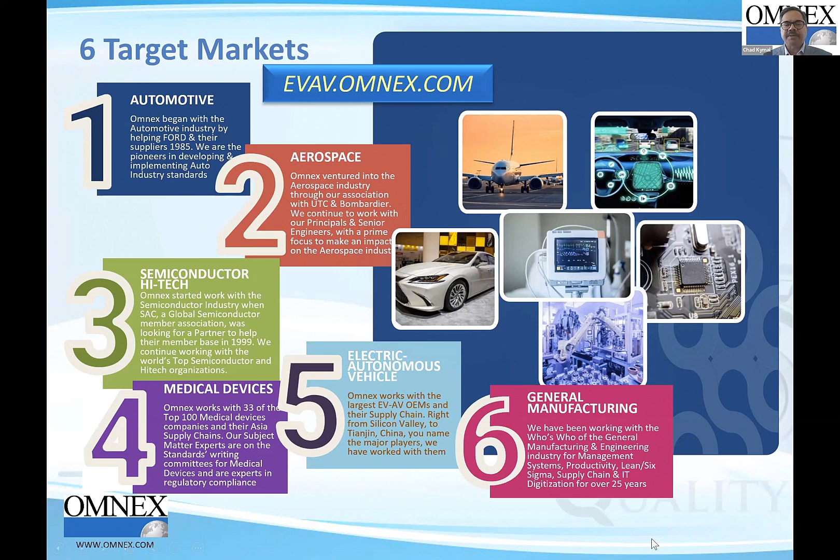So this is what we're going to talk to you about today. The idea of foundation FMEAs, family FMEAs, and part FMEAs. And a couple other things. Of course, Mr. Mike Down will talk to you about the reverse FMEA that he so loves to implement and do, and he trains. And we'll finish up talking to you about innovations coming from Omnex on linking requirements, about how we do AIAG-VDA FMEA, and also something called the multi-point FMEA.

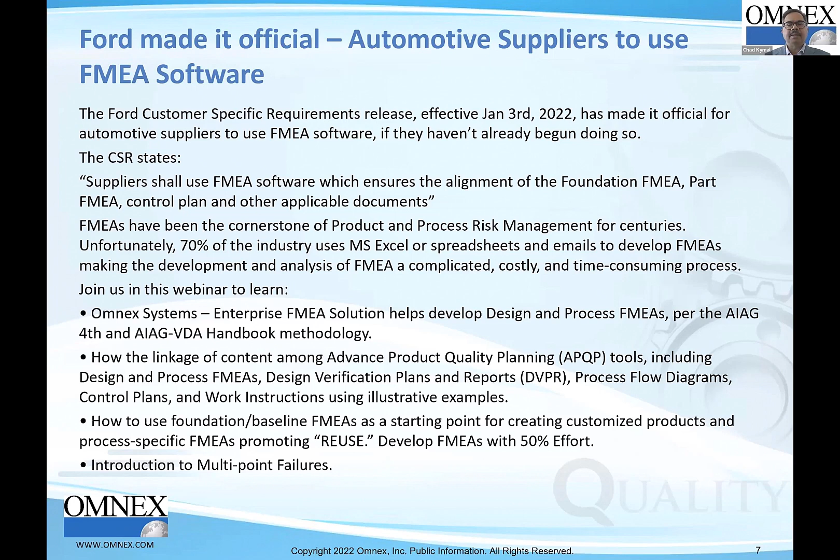So a little bit about myself. I'm the CTO of Omnex. I've been shepherding AQuA Pro and the enterprise-wide integrated quality management system software since its inception in 1988. So the software we're showing you today came out first in 1988, also because of Ford Motor Company. Ford had a standard called Q101. Some of you might remember it. And the first 2 questions were on FMEAs and control plans.

The other thing I'm quite proud of is coming up with the linkages of process flow, PFMEA, control plan, work instructions, and then DFMEA and DVP&R. But I had very able support from Mr. Greg Gruska. Greg, you might think of as the grandfather of all these linkages. He helped Ford Motor Company come up with what is called the DCP, initially called the Dimensional Control Plan. And before that, he wrote a book called CP Squared that talked about FMEAs and control plans needing to be very comprehensive. What year was that, Greg? 1985. So he is a forerunner of much of today's FMEAs.

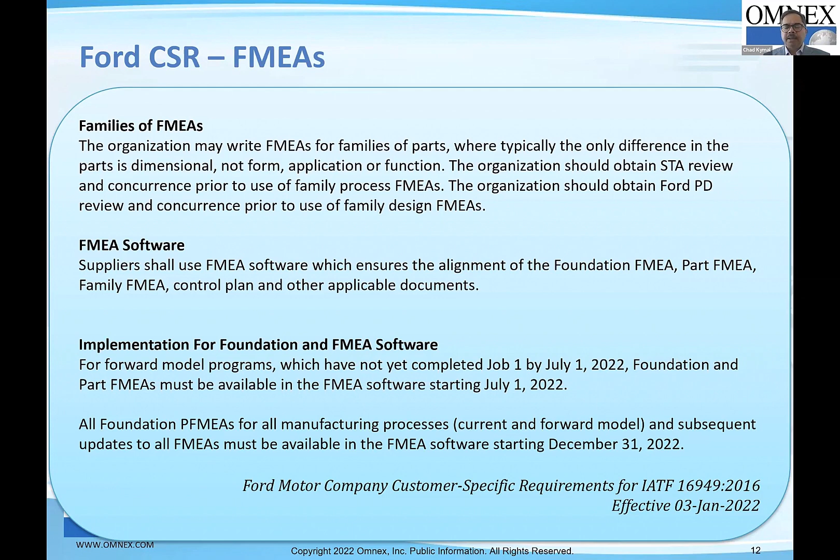Now, when you look at this, foundation FMEAs and part FMEAs can be both for design and process. Ford is asking it for the PFMEAs, all right? And then you have to continue on populating and updating all your FMEAs in the software by the end of the year. So you can see here the requirements for the Ford CSR.

At this point, Nikhil, let me turn the presentation to you. And let me also introduce Mr. Greg Gruska, who is part of the Core Tools Supplier Task Force member for the 4th edition FMEA. Go ahead, Greg. Thank you, Chad. All right, let's go to the next slide. Okay, you switched presentations. Okay.

All right, foundation FMEAs. It turns out foundation FMEAs is, in concept, nothing new. In the past, people have called it corporate, generic, baseline, best practices, and whatever. And Omnex AQuA Pro has referred to it as global FMEAs because they cover all the different products and processes that you have. But these are being called foundation FMEAs in the Ford CSRs, recognizing that they do have these other terminologies.

And the foundation FMEA really is the accumulation of information. From the very beginning, the logic in the FMEA manual has been that you need to keep the FMEAs up to date whenever you make a change in the process, you make a change in the product, you find information with respect to problem solving. And so it's always been around, but people haven't really been doing that well.

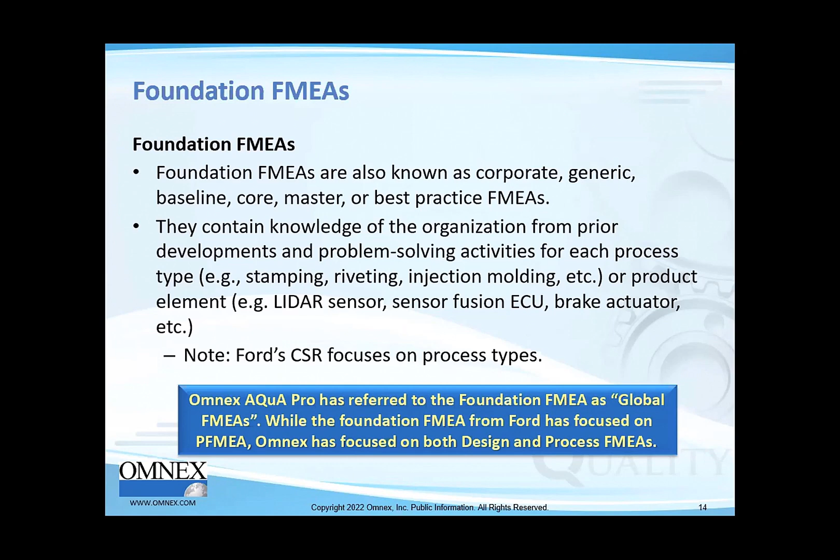So they present the generic content of the FMEAs. And as such, they are thought of being used as a starting point for specific FMEAs. And from that standpoint, they could also create less of a workload for the specific product FMEAs, because you do have a lot of that information pre-done. Now, again, that has always been around, but the basic assumption is that you keep the FMEAs up to date. And unfortunately, that wasn't always true.

When we go in for audits or improvement to a lot of processes and we ask to look at the FMEA, they go in the file drawer and blow the dust off the files because nobody's taken a look at it since they had submitted their PPAP. And so the FMEA is not really up to date. So in this case, the foundations must present the experience and knowledge that we have had in the past, why we did what we did. They look at it over the entire service life.

So if we do have a field failure and we have to make a modification because of that, we want to go back and update the FMEA. Again, that has always been part of the problem-solving approach. When we are looking at the 8D, where it says in D7, we're supposed to look at other processes. So we need to update the documentation. If you look at effective problem solving, CQI-20 from AIAG, they actually say, look at the FMEA when you're doing your problem solving.

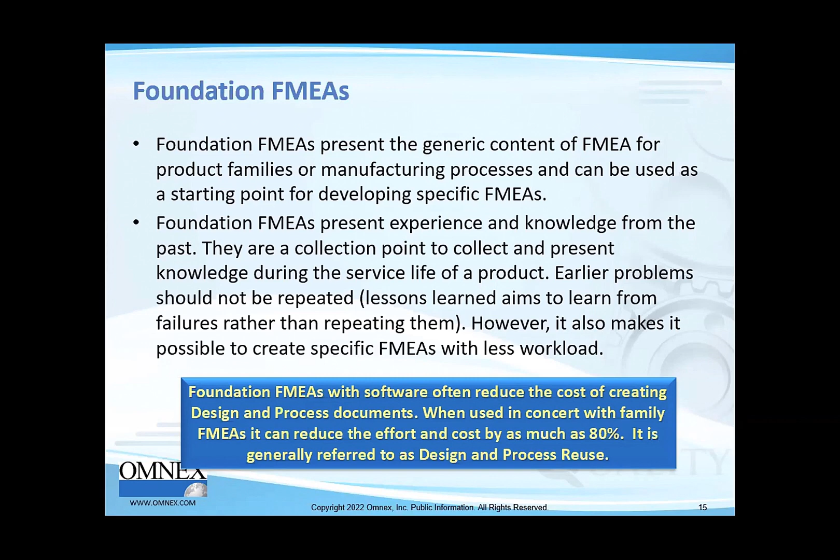So CSR, Ford CSR says that organizations are required to have foundation FMEAs. And again, foundation FMEAs without software is useful, but not very efficient. Because if you do not have the software to align the foundation to the family, to the individual product, that means somebody physically has to go through each of the individual documents.

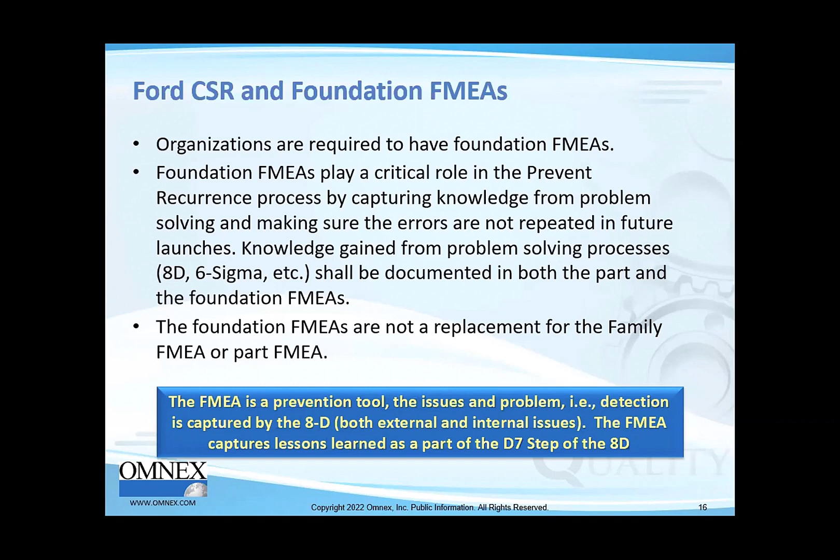So when we look at families, this is specific applications, if you will. The only difference between the parts and the families are dimensional, not form, application, or function. Whereas the foundation tends to be process oriented and really could have all different types of parts, because really we're looking at how we're controlling the process, or how we're adding into the parts itself.

And Chad did mention before that if you do use family process FMEAs, you should get a Ford STA review and concurrence prior to the use. And if you're doing that in design, you should get Ford product design review and concurrence. But essentially the foundation is something that has information for all the families.

So we can look at it as the cascading, that we are starting off with the... hit enter, Nikhil.

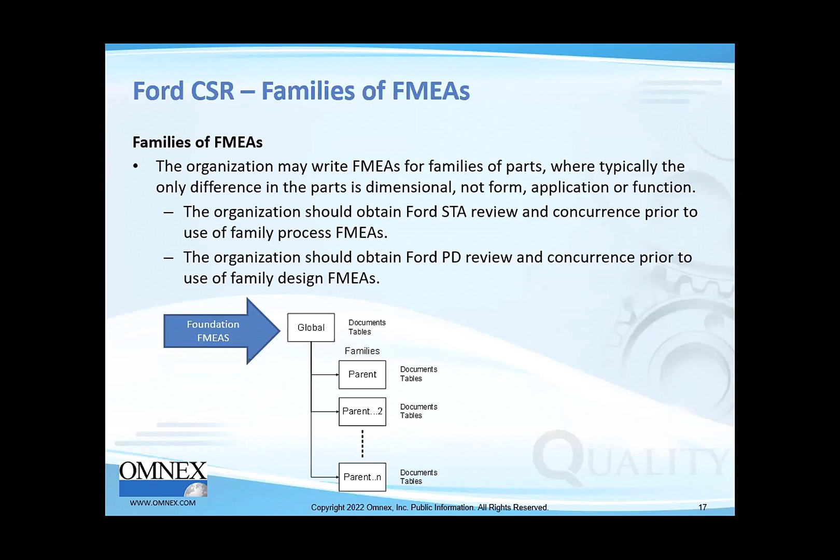Now the Ford CSR also talks about the information flow and linkages. And this, again, is one of the reasons why you need the software, because if the part and the foundation FMEAs are to be living documents, they must be aligned. Can you do this alignment manually? If you do Excel, certainly you can. You would probably have to have somebody working full-time to assure that any change made in the foundation will cascade to all the parts that are using that foundation FMEA.

So the update in the foundation shall result in a review of applicable information for the part. In addition, the FMEAs also need to be aligned to the control plans. The FMEAs, and this is in the FMEA 4th edition, show the control methods. The control plans detail what those methods are, the how many and the how often, and what are your reaction plans. And that information also needs to go to work instructions and visual aids.

So the CSR says the software supplier shall use FMEA software which ensures the alignment of the foundation FMEA, the part FMEA, the control plan, and other applicable documents. So the more capability you have in your software package you're using, the easier it is, the more time you can save. And notice it does also refer to special characteristics.

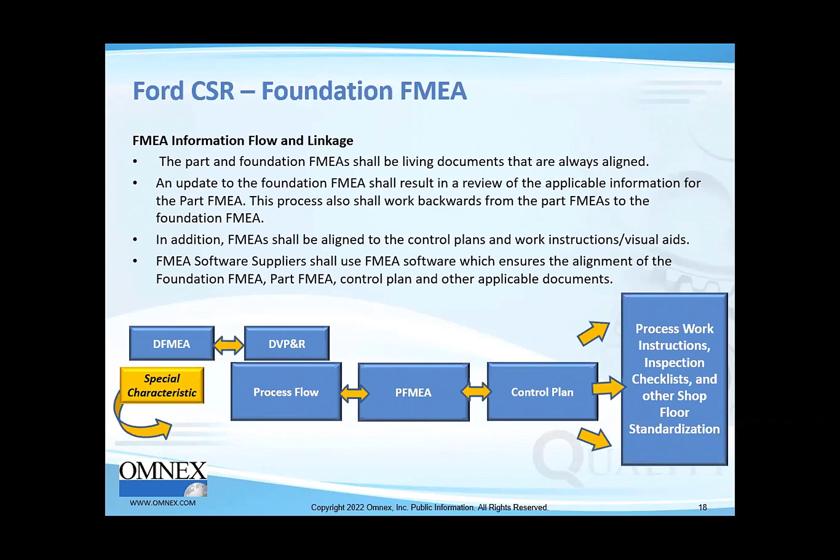So this is again what Chad has said, so I'm not going to spend time on it, that if forward model programs which have not yet completed job 1 by July 1st, 2022, need to use the software starting July 1st, 2022. All foundation PFMEAs and subsequent updates to all FMEAs must be available on the FMEA software starting December 31st. And as Chad said, this is quite aggressive to be able to do that. So you need to start looking and considering how you're going to do that now.

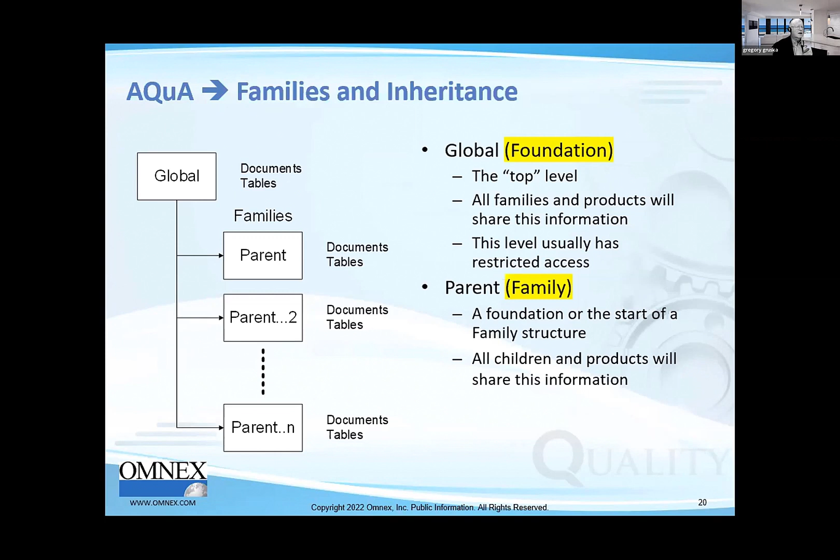So a parent can have a child or multiple children, and you can actually continue the inheritance or the cascade down into grandchildren and great grandchildren. It depends upon how much reuse you're going to do and what is the modification.

We need to mention at the family, you can edit things and add things for that part family. In a child, you can add extra characteristics, tools, processes. So can a grandchild. And the big idea is if you change the family, all the part and the grandchildren change. And in this way, you can take your 8D and update the family and have all the many 30, 40 part numbers running around the world all change at one time.

Yes, you can. As it turns out, I personally like the analogy between parent, child, and grandchildren, because you do have some children or grandchildren that inherit from the parent. However, they don't have to keep it. They can make modifications, and so that is the capability.

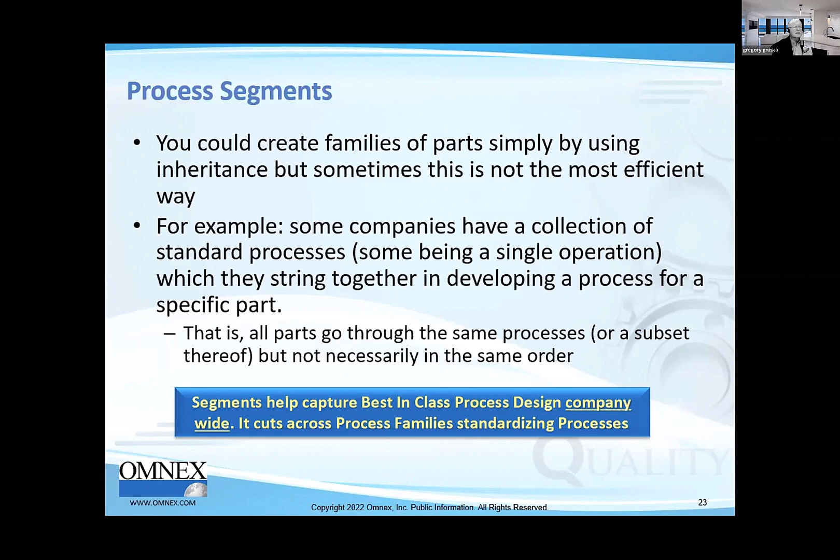So for example, you can think of it as a tool room. In a tool room, you have a bunch of standardized operations, and yet a given part will take different paths through that. So if you're creating a flow, FMEA, or control plan, you essentially use the information for each of those individual segments. So we create foundation FMEAs for receiving, for milling, for drilling.

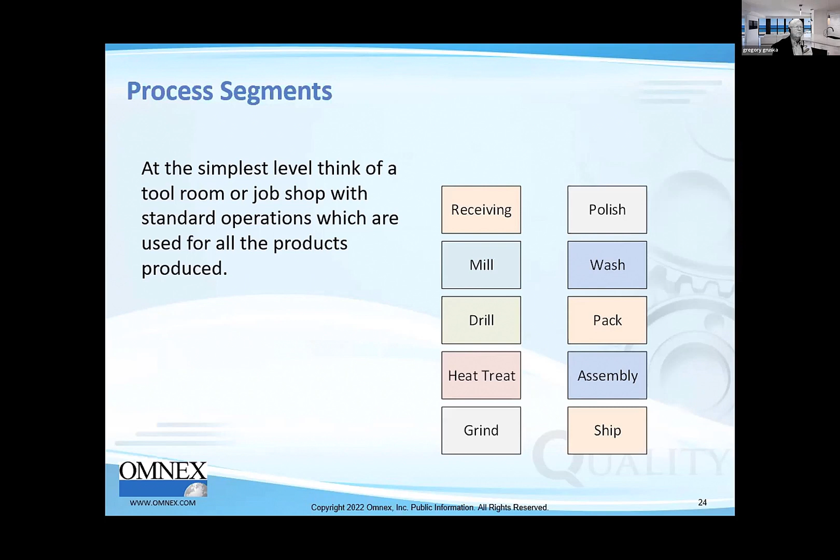Next slide. And then for a given product or family, you put them together in a library of best-in-class processes. So in this case, we just have one mill operation, but we could have two different milling operations, depending upon what it is that you're doing.

You can do the segment at the parent level. And if you do it at the parent level, then all the children will also inherit the same segments, or you can reorder the segments, as it were. So what this does is provide you the ability to have consistency in the control plan by machines, and yet very rapidly come up with the process review documentation — the flow, FMEA, control plan — because the software will put it all together once you've identified the segment map itself.

Now, this is dealing with processes. Next slide. But you can also do the same thing for design segments. So we could analyze the different process functions and requirements, and then do segments within the design itself. That includes all the unique functionality, requirements, testing, and analysis. And the design segments create a best-in-class design library.

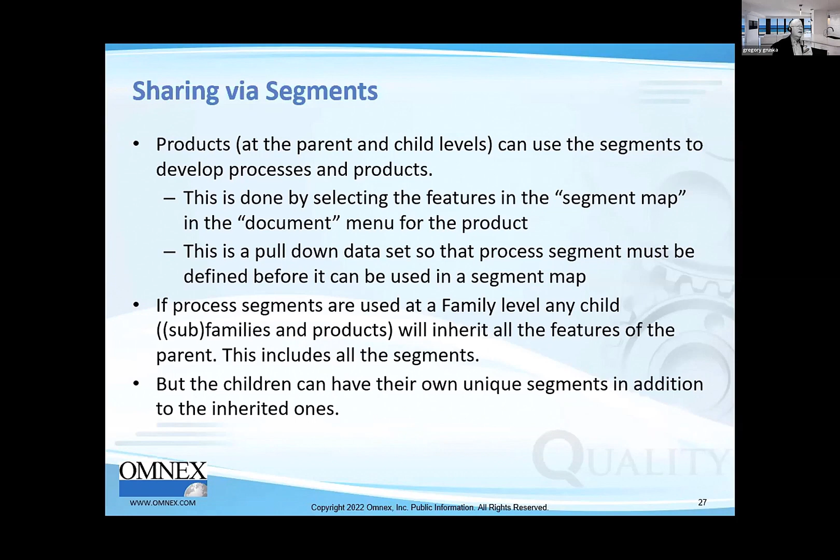Next slide. Now products can use the same segments to develop their own process and products. You do this by selecting the features in the segment map and in the document menu for the product, so you can pull it down. You don't have to do a whole lot — you point and click. If the process segments are used at the family, any child, subfamily, or product will inherit the features of the parent. This includes all the segments. But the children can have their own unique segments in addition to the inherited ones. Next slide.

Once the segment map is complete, you can change any of the inherited information, as well as add new branches to the developed process documents. The key thing to remember is that inheritance only goes down, so you need to plan how you design your processes as you go through.

Now with that, I will turn this over. No, I got one more slide.

Inheritance and process segments make it faster to create new parts and make it possible to update groups of parts simultaneously. Inheritance and segments are a way of sharing process information between different parts. So if a change is made in the parent or the foundation, it would also be made in every child, unless the user does not want it to be updated. So you have the flexibility, you are not forced to do that.

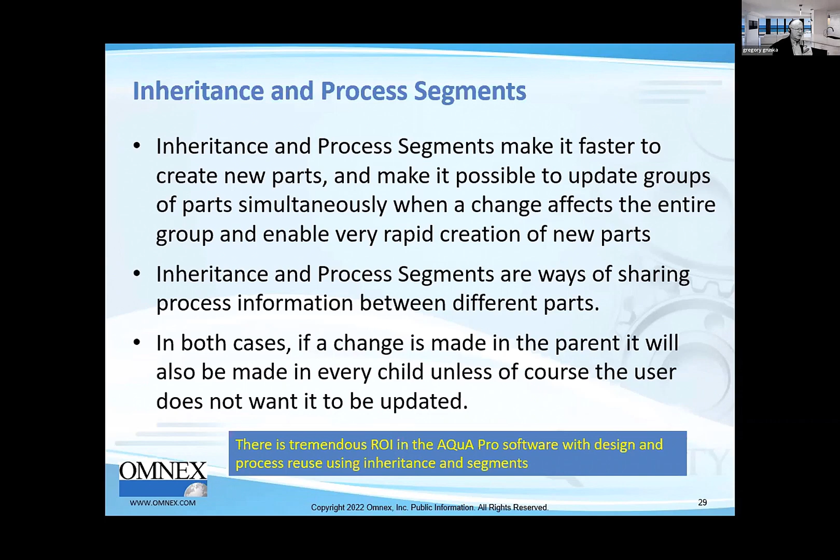So there is a tremendous return on investment in the AQuA Pro software with design process reuse, using inheritance and segments. With that, I will turn it over to Nikhil, who will actually show you its use in AQuA.

Thank you, Greg. All right, thank you, Greg. So you should be seeing AQuA Pro right now, just to confirm. Yes, we can see it.

All right, thank you. So in the AQuA Pro tool, we're going to see how the Ford CSR requirements can be effectively satisfied. As Chad and Greg mentioned earlier, we have the foundation FMEAs. At the global level, we have the foundation FMEAs residing there. You can see processes such as grinding, label installation, receiving, screening machine, and other processes all residing at the top.

Now if I were to see, for example, what the label installation is going to look like, I can open that up and see how that will be captured. We can call these the process types that Ford refers to in their CSRs. So as we go down, you can see this is what the label installation can look like. In this way, we have these global process types that standardize best-in-class processes globally in an organization with multiple plants all over the world.

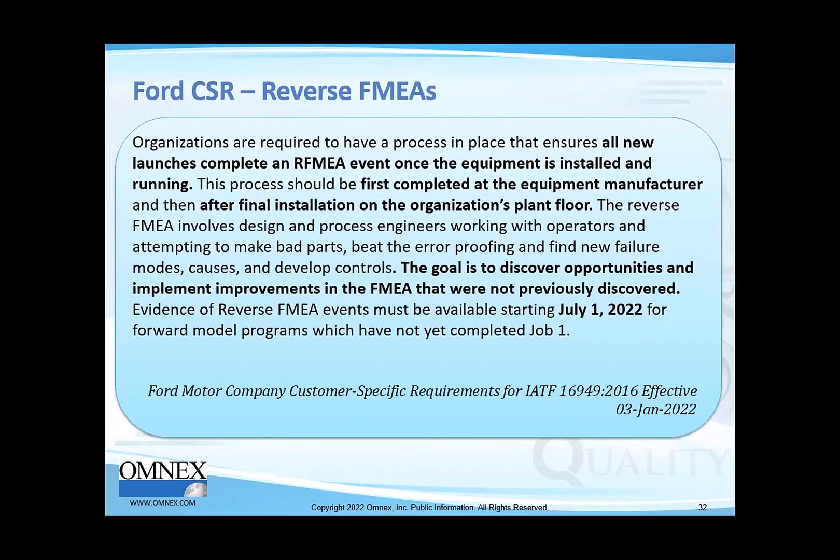Go to the next slide. And with that, let me turn it over to Mr. Mike Down, who was the lead for the Core Tool Supplier Task Force. Go ahead, Mike.

Thank you, Chad. The reverse FMEA is relatively new in the industry, and it's a tool to have continuous improvement based on site reviews and observations. So when you do a reverse FMEA, you're physically going out to the operation, you're looking at the different controls, you're looking at how the operators are doing their jobs, and you're trying to evaluate, using the PFMEA, whether all of the failure modes and causes have been identified. Through the investigation, we want to make sure that the preventative controls and the detection controls are effective. Next slide.

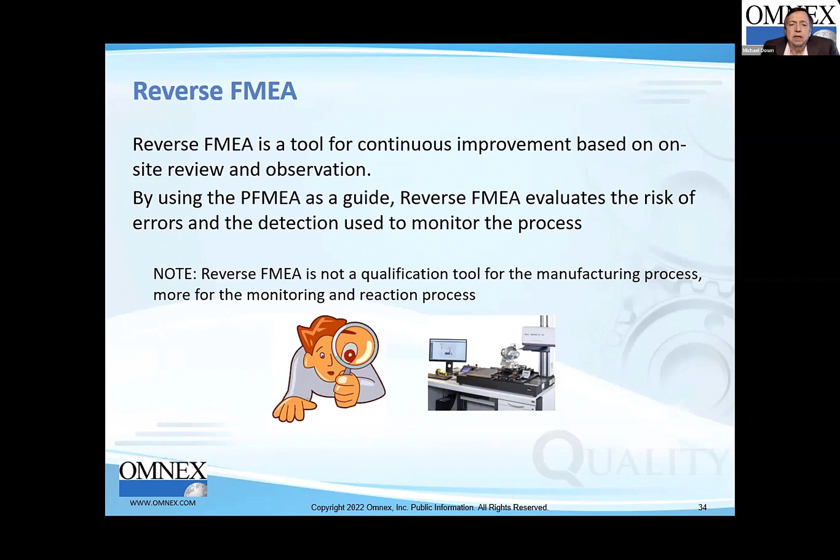So the PFMEA, and we call it a reverse FMEA, and the fact that it's going to play off of the PFMEA, which it doesn't matter what format is used, whether it's the conventional format or the AIAG-VDA format. It's basically focusing on what preventative and detective controls were identified, what action items were identified.

So when I do the reverse FMEA, a team will go in, and it specifically is operation by operation. So it's not just a walk through, you know, op 10 through op 120. It's actually taking op 10, and they might spend the day just looking at op 10. And it would be a cross-functional team that would be focused with expertise around whatever that op is. So if it's a milling machine or milling operation, it would be the experts around milling.

And that team would look at the PFMEA, look at any action items that were identified. They also pull any 8Ds that recently had been on a similar process and make sure that this new operation doesn't have some of the same issues. So they'll go back, starting at the recommended action, work through, look at the risks that were identified for the detection and prevention controls, and make sure that through testing.

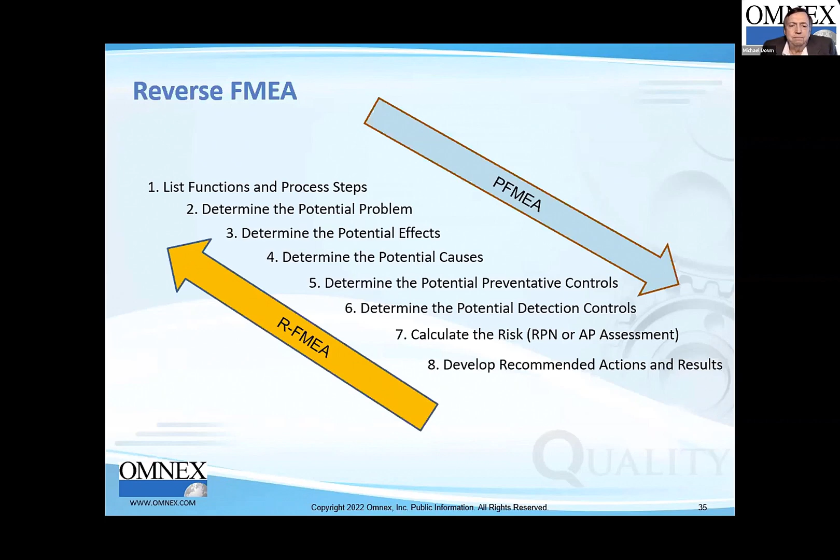So the purpose of the FMEA is to improve the robustness by making sure that the preventative controls and detection controls are meeting those risk assessments that were done during the PFMEA analysis. So we're taking that PFMEA, and in actuality, the reverse FMEA team will be making an evaluation of how well the PFMEA was done. It may require the plant to redo or update the PFMEA for that operation if they don't think it was done well enough. You can't really do the reverse FMEA on a poorly done PFMEA.

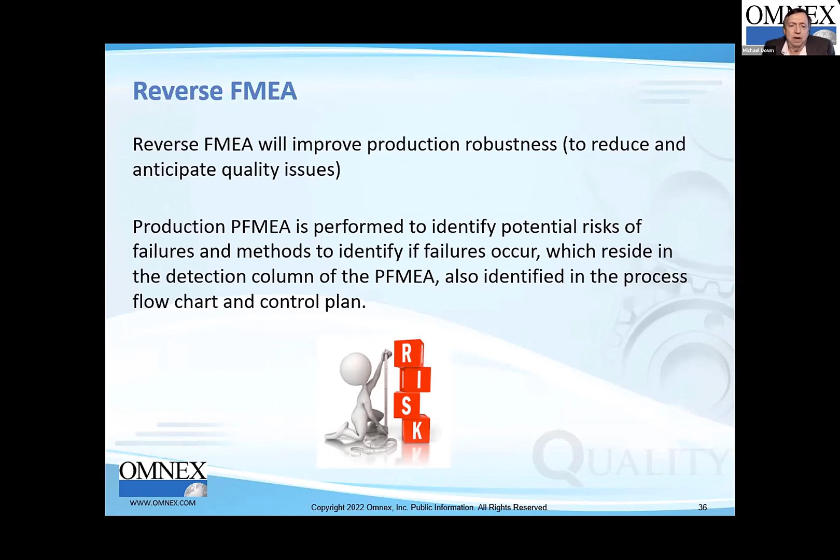And so the first thing they try to do is: have all the potential errors been identified by the PFMEA? So they'll look at maybe they missed something when they did the initial PFMEA, and they'll identify that. Two, if a discrepancy does occur, how long through the system does it take to be discovered? So this is where we do the red rabbit. We actually are going to test whatever the preventative or detective control is and make sure it effectively can detect these issues. And then three, it may turn out that we discover new things, or maybe the risk needs to be changed, but there may be an update to the PFMEA based on this evaluation that the team makes.

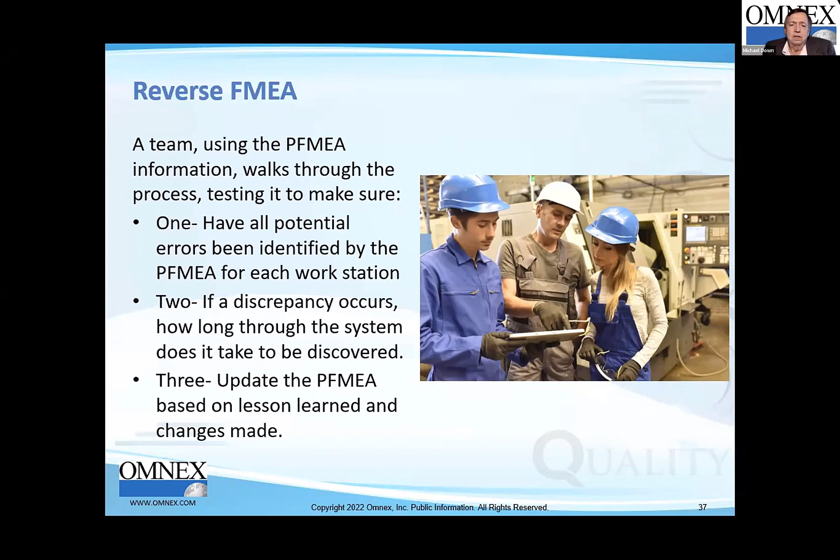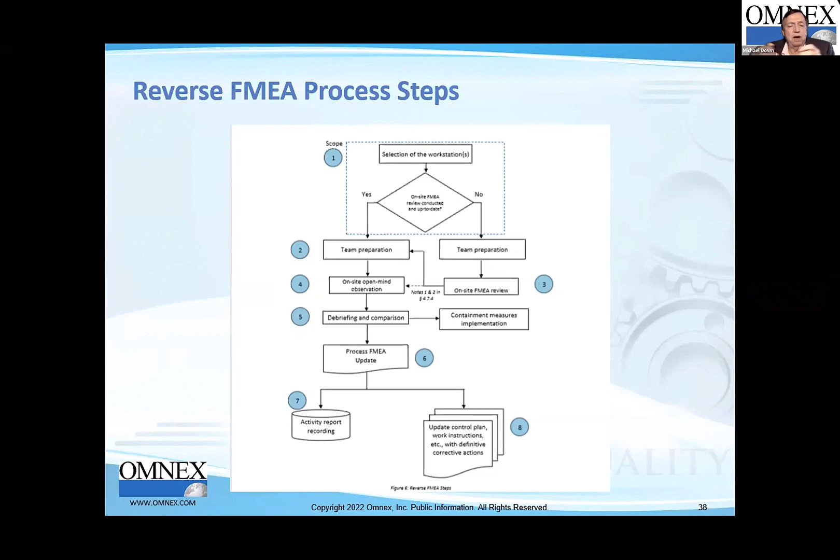And then there's going to be a final documentation, which is what did the team find and what updates had been made. But the big part of this is at the end, making these updates and making sure that the permanent preventative action is in place, and we're keeping this customer safe from any defects getting out of an operation or getting out of the whole process.

I think the next slide, and that's Nikhil. Thank you very much, Mike. Nikhil, let's go past this.

All of you have seen when the changes are made, you can go back into AQuA Pro and make the changes you need. There's a lot of interest in AIAG-VDA, Nikhil. So let's go forward, and I'd like you to show the AIAG-VDA in the next section. Folks, you'll be very interested in seeing how we do it with the software. Can you go to the next slide? Oh, there it is. So folks, we are now going to discuss. Greg and Mike, you want to talk a little bit about the AIAG-VDA 7 steps and maybe some of the improvements we have made with the software and also our methodology in the AIAG-VDA.

Greg, you want to take a first crack at it? Yeah, I guess I can. As you can see, the orange boxes are the standard 7 steps for the AIAG-VDA that's in their handbook. In doing it and actually trying to implement it, we found that it was really not complete.

So we added some additional modifications to it. For example, in step 2, as you can see there, we require or add the P diagram and the interface diagram, which are very common requirements from customers, from OEMs, as well as the requirement for a block or boundary diagram.

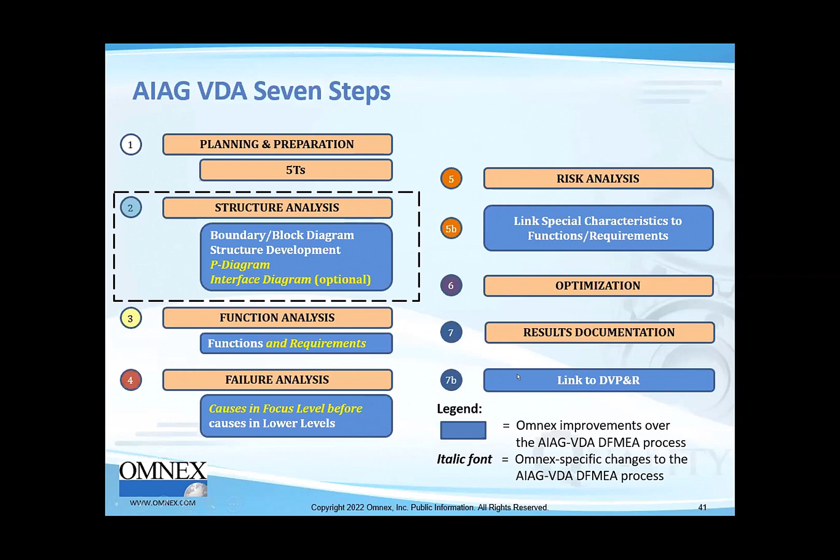Yeah. And Mike, I have a specific question for you. Mike was a part of the SAE J1739. Mike, we have the 4th edition. We have the AIAG-VDA FMEA. Why did we need an SAE J1739?

Well, J1739 has always been the standard. The AIAG-VDA is a handbook, and the reference document at AIAG is a reference document. Basically the J1739 is the standard. What we tried to do with that standard was work in some of the developments that were made for the AIAG-VDA. Things that we didn't change: the J1739 is based on a common format that's very similar to the 4th edition reference manual.

But we did replace RPN with action priority. Now, depending on who your customer is, you may not have to eliminate the RPN. They may want to have RPN. You could do it with RPN, but we also give the option to do action priority, and that's what's covered in the standard.

We also updated the ranking tables to be similar to the AIAG-VDA, and we've included the MSR, which is kind of the functional safety piece that's looking at monitoring and system response. So it's looking at mechatronics. And then it has a 6-step process that's been defined.

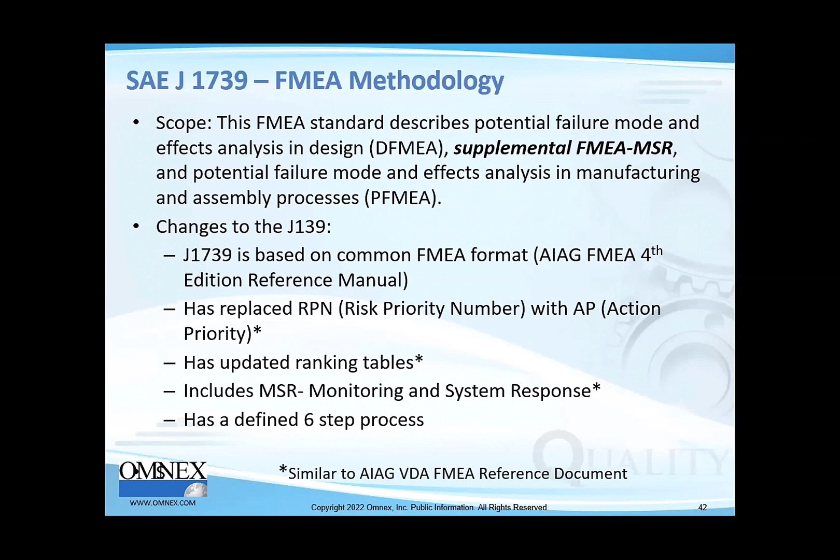Nikhil, why don't we show the software and show both the different formats. The Omnex software, by the way, folks, was developed in the 1980s when there were lots and lots of different formats, so you can change the formats at will. And so here it is, a design FMEA. Go ahead, Nikhil. Showing it in the fourth edition.

And you can just go to the format table. And by the way, it satisfies Honda, it satisfies BMW, who's also required it, any different format you want. All you have to do is go pick AIAG-VDA, and immediately the format changes. Okay.

So of course, there's some significant changes between the fourth edition and the AIAG-VDA FMEA. By the way, Greg will tell you fourth edition recommended it, but didn't mandate it. What is that? They require the links between the system, subsystem, hardware, software, which is a structure analysis, and the requirements flowing down, okay? So our software, once you do those two steps, you can pull up the fourth edition format and pull it up in an AIAG-VDA FMEA, which we think is a big deal.

Do you want to show sort of the block diagram and whatever other tools you want to just show very quickly? Absolutely. We'll probably run a few more Q&A. We have questions, please share your questions.

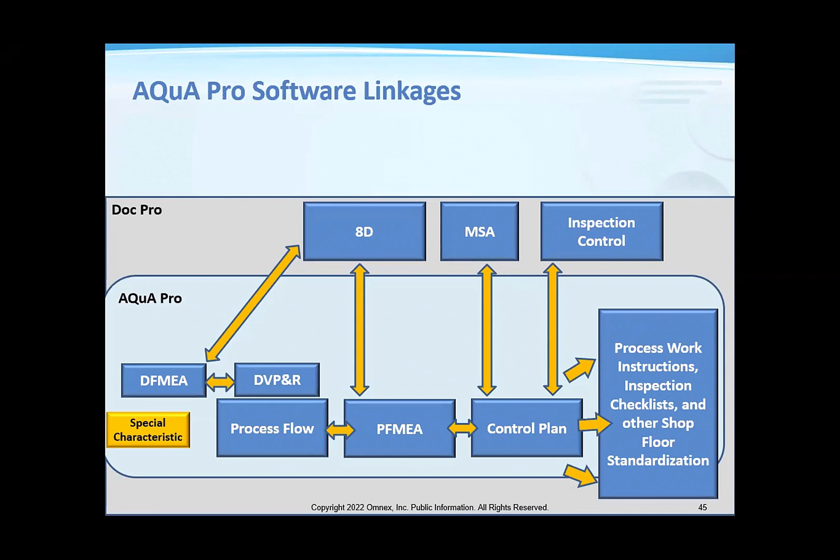I want to just finish up by telling you what you looked at just was the DFMEA, DVP&R, all the way to the control plan. But the power of the software is not just there. When you do the 8D, it'll automatically link to the DFMEA or the PFMEA, which you can update. By the way, you can force this if you want, mandating it, or you can make it optional that the D7 step comes in and updates it. The MSA links to the control plan, and then the control plan and the check sheets and the work instructions, you can actually take out in a handheld mobile device if you want, and you can enter all the data in live or in a computer or a tablet on the shop floor, okay? So very powerful. Go to the next slide.

Let me just say, today with mechatronics, electronics, and software, 30% of the failures are actually multi-point failures. Folks, we're the only software in the world that has multi-point failures built in. Thanks to the experts that we have in Omnex, they have recognized this, and you will not be doing efficient DFMEA if you did not do a multi-point DFMEA. Go to the next slide. We also have linked DFMEAs, FMEA and FTA, very important for functional safety. Go to the next slide.